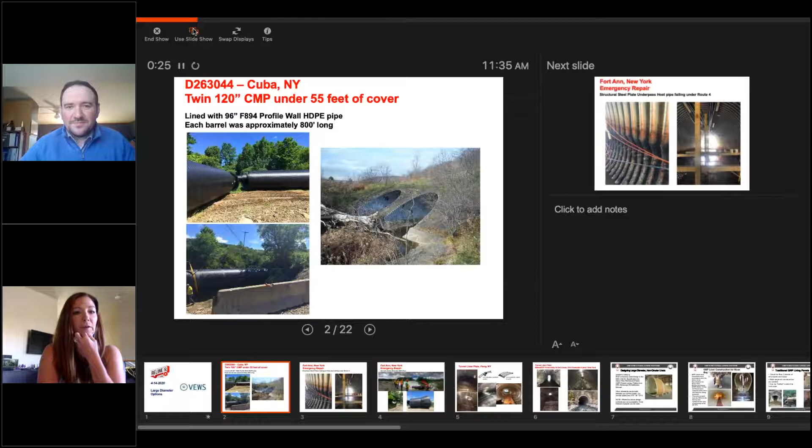So tell us a little bit about this project. Sure. So I guess in general, this Reline Live with Cassie, she asked me to highlight some options for larger diameters, and what we mean by that simply is usually typically greater than 60-inch, 5-foot span. I've been fortunate enough to have a number of large diameter projects come across the Northeast region here which I've been involved with. What you're seeing here, to kick things off, is probably the longest total footage of pipe that I've been involved with in any project to date. This total job was about 1,600 feet. It was a good project - a paved invert host pipe, 120-inch, roughly speaking, host pipes, double barrel, underneath Interstate 86.

And they had quite a bit of cover. As you can see, the shallow cover you see in the picture on the right is actually just an access road behind the highway, and there was 55 feet of cover on top.

So Cassie, one of the things I often hear from some DOTs is they're not familiar with the fact that high density polyethylene liners can be buried as deep as 50 to 60 feet, even deeper sometimes. Do you see that out your way?

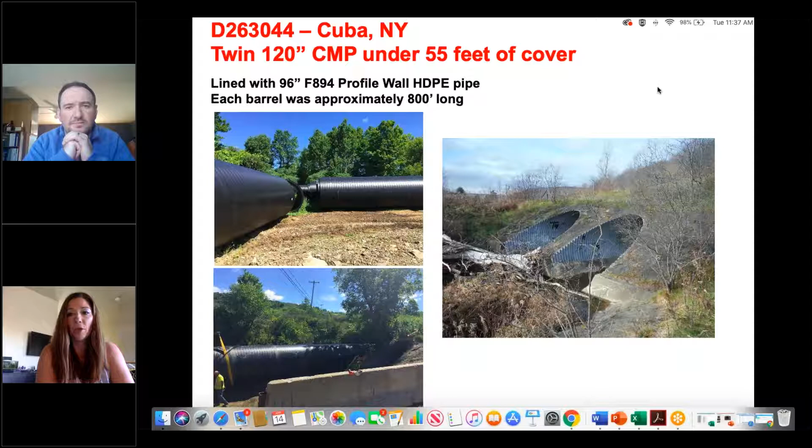We don't see a lot of pipe buried that deep. I will say there's a couple, and I don't know if Kelly is on or not, but he's done a couple of projects in Utah that have deep cover for sure.

Sure. We have, as you can imagine, quite a bit of terrain change out here in the Northeast. But out here in New York, this is actually an interesting territory - there's not a lot going on out there. They call it the southern tier, basically, of New York. Beautiful country. There's a cult following cheese store in that town of Cuba, New York.

But this one was 1,600 feet of 96-inch ID. So when we talk about profile wall high density polyethylene, that is usually an inside diameter dimension, and then the OD is in addition to that diameter. So this was 96-inch inside diameter, and this was all welded together pipe.

And one of the reasons the DOT chose this pipe is for service life longevity, and obviously with the stream being what it was, there was some decent scour potential, hence the reason they had the paved invert in the host pipe. So they like the abrasion resistant properties of the high density polyethylene.

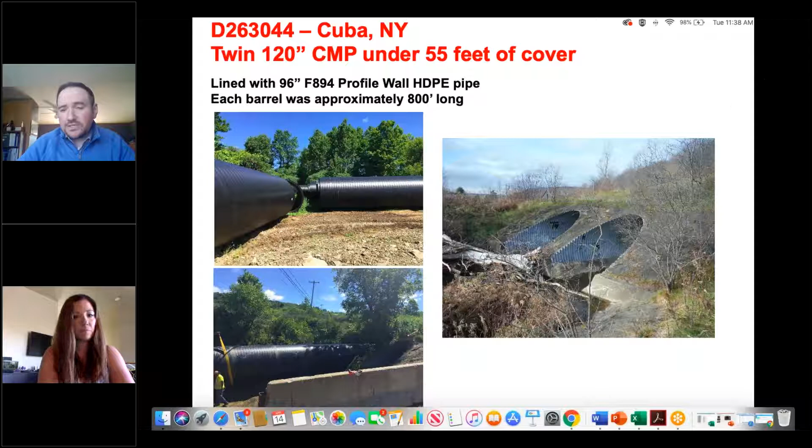Okay, really neat job. I had a friendly contractor do a fantastic job on that installation.

So one question that came in prior to the call: when looking at jobs, you started talking about why they chose it, the abrasion factors and things like that. What would you say are the top 3 factors you take into consideration before recommending a product? Because you do a lot of recommending when you go out on these job sites, right? You're coming out, inspecting the pipe, going through it, and then coming in saying, here's a few options I would recommend.

100%, Cassie, that's correct. I do have a top 3, which I'll give you in a sec. I actually do a presentation called 7 Design Considerations for a Reline. The 3 I think hit the top, not in any particular order, are hydraulic considerations, structural considerations, and service life.

Oftentimes service life, most of the things that you and I typically look at are like, hey, we want to push 75 to 100 years plus worth of service life underneath our highways and roads. So usually that service life thing is an automatic checkbox, because we know that everything we're talking about is going to offer a 75 to 100 year minimum service life. So the 2 that are left are hydraulic consideration and structural. Those are really the 2 top.

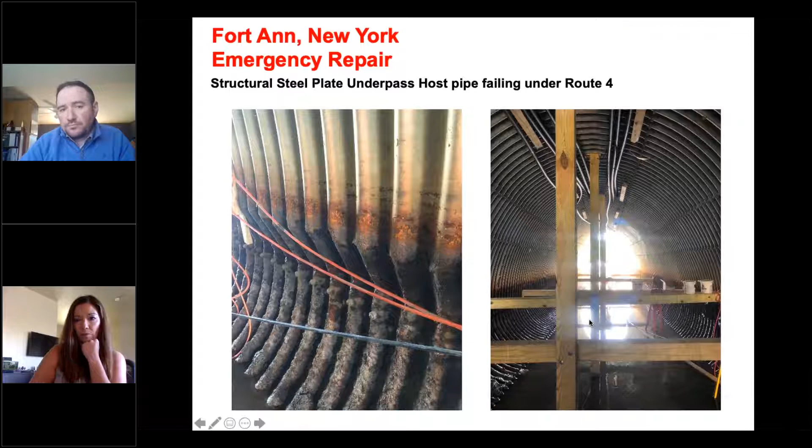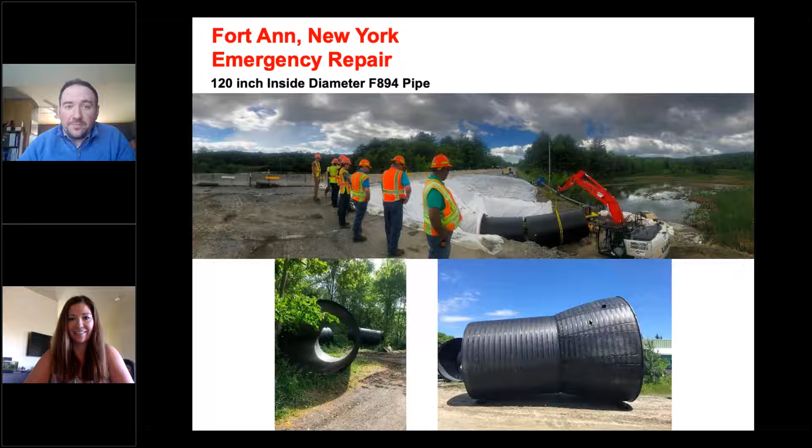So Cassie, I know for a fact you guys see a lot of these really bad pipes, and you get phone calls from folks who are like, oh, this pipe's too far gone. You ever hear that sentence? Oh yeah, we get that a lot, especially where there's a lot of water. We do a lot in Oregon and Washington, obviously Idaho since we're based here, but with a lot of the fast moving creeks and streams and rivers, we can get a lot of rust, and this looks very familiar on the top left - the abrasion. Yeah, absolutely.

I get that sentence all the time, either from an engineer or owner who might think that a host pipe is too far gone to be a lining candidate or a slip line or a rehab candidate. And oftentimes, there is a possibility that you can salvage that culvert with a rehab.

In this particular instance, this pipe was in horrible condition. It actually partially collapsed on the upstream 30 feet, but we were able to salvage it and bring it back to life. We used a 2-flange tunnel liner plate. We had to cut out some of the invert and do it safely. So we were able to accommodate that with the tunneling capabilities of tunnel liner plate and keep everyone safe while doing so.

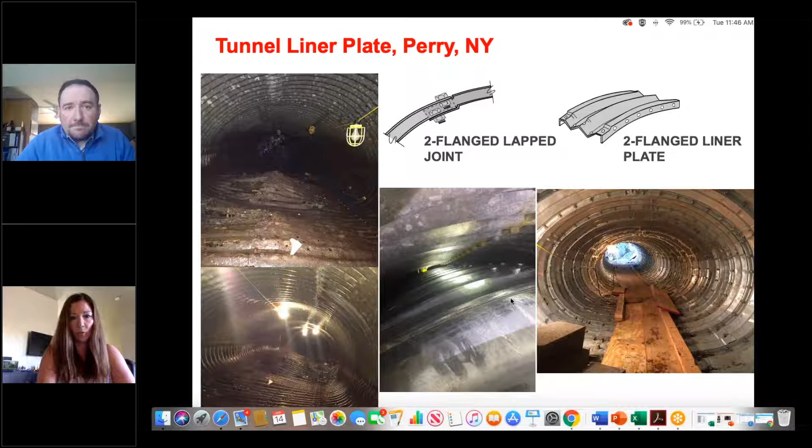Do you want me to go to the next slide? Sure. Oh, yeah.

So just another great seeing example. What's that? I said I like seeing these kind of projects. Fun shapes, interesting. That's an interesting culvert.

Yeah, they are. And I think that's part of the affinity for these plate solutions is they fit a need in the sense that a lot of these structures are so old and so far gone. I mean, they're beautiful structures, right? You just can't imagine how they put this stuff together 100+ years ago.

Yeah, and both of these were incredibly gorgeous structures. From a bridge geek and a structural engineering geek, I really thought that they were really neat to look at. The two pictures on the left are right here in Maine, where I live, in Freeport. And the top picture on the left is the host, this beautiful stone arch on top of wooden logs, believe it or not, underneath Route 1. So it's one of the heaviest traveled roads in Maine.

And we ended up putting a sort of underpass shape in there with some baffles for bed retention sills for eels. So it met not only the structural component, but it also met the DEP, Department of Environmental Protection's needs as well from an aquatic life sensitivity perspective. So once again, salvaging this structure, not having to dig up 30 foot of roadway and Route 1, and able to pass all the needs of the structural and the DEP.

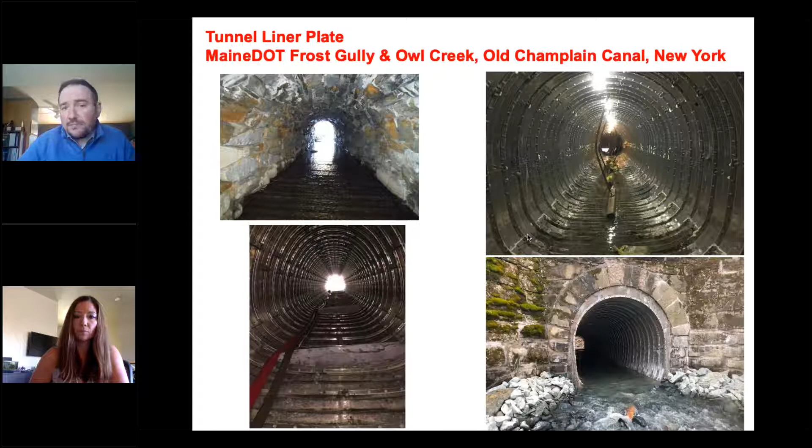If it's a corrugated product coming out of a corrugated plant, most often, at least here in the Northeast, we would weld those in. But I think they could probably accommodate you. In a few slides, I'll show some HDPE baffles too, which we could do in the plant or in the field, depending on what works best for that particular project site. Great question, though.

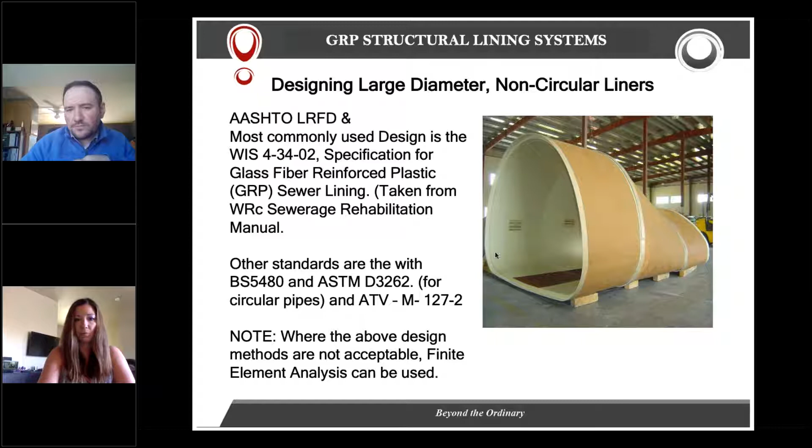You'll see in the next slide - Cassie, if you want to go ahead and toggle over there. Oh wow, yeah, so nice egg shape for sewer, but we also make some really tight corner radius pipe arches for culverts as well, where we've got some of these really cinched haunches.

I've been dealing with a lot of these culverts - they were arches and they've crimped down a little bit over the last 40, 50 years, so the rise has gone down underneath live and dead load. Trying to fit maximum hydraulic openings within these little areas has been a unique challenge that the fiberglass GRP has been able to meet.

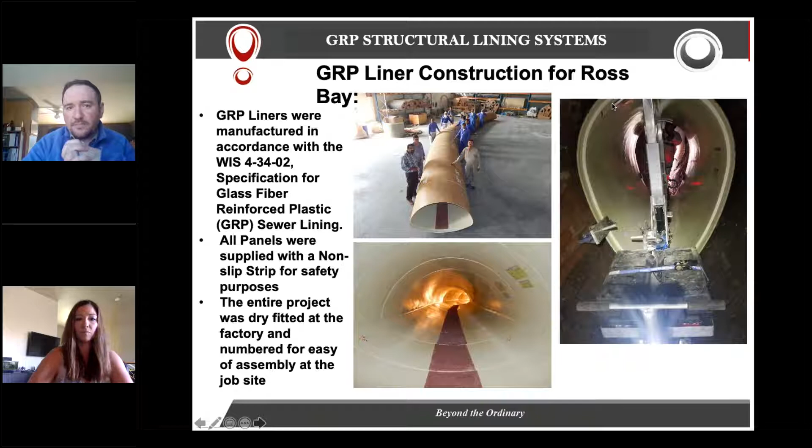There we go. This was the other gap that I didn't really have. We can fit some other shapes in there. What I found - you probably hear it, Cassie, out your way - sometimes engineers and owners will say, hey, I've got this 3-foot rise by 10-foot span box culvert that was built 100 years ago. Can we shove 3 round pipes side by side in here?

And the answer is yeah, typically, but I usually caution and say, you're either going to restrict your hydraulics quite a bit, because you've taken a rectangle and put 3 smaller pipes inside. Part 2 to that is they've possibly created a debris capture potential on the upstream end, because trees and twigs can get caught by reducing that area.

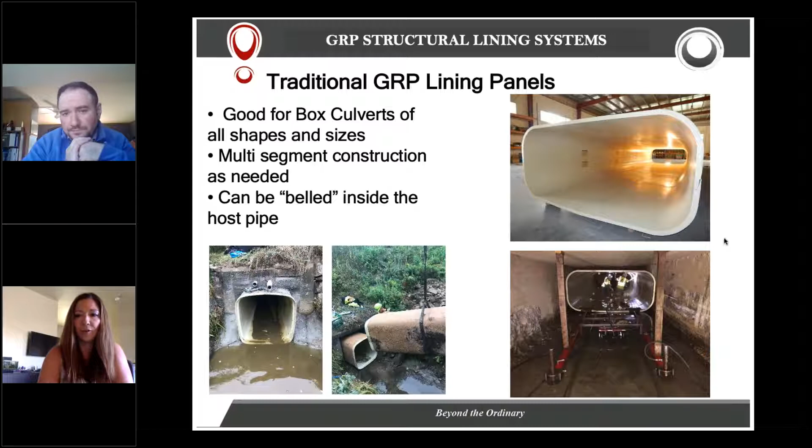Now I realize this is all very 30,000 foot view type stuff, but Cassie and I were talking about maybe doing a little mini series afterwards if someone wants a more specific Reline Live in the future. We could certainly talk more deeply about some of these other solutions. But this is more on the unique shape offerings of GRP.

I don't want to insert foot in mouth here, but if you've got a shape that you need, if we can think it up, we can probably make it. So you can just see some other unique shapes there.

To answer the bottom left question there, Cassie, about the bell and spigot - you can see they're pulling that in with a winch system. There's maybe some 2x4s in the invert there, and they're belling that up inside the host pipe, sliding it in and snapping it inside the pipe. So it offers you some versatility if you need to come at the pipe from both ends, for example - if you had to, you could.

That's definitely been cleaned out too. You can see how to slide that in there like that. Yeah, absolutely, and they've got some skid rails down at the bottom.

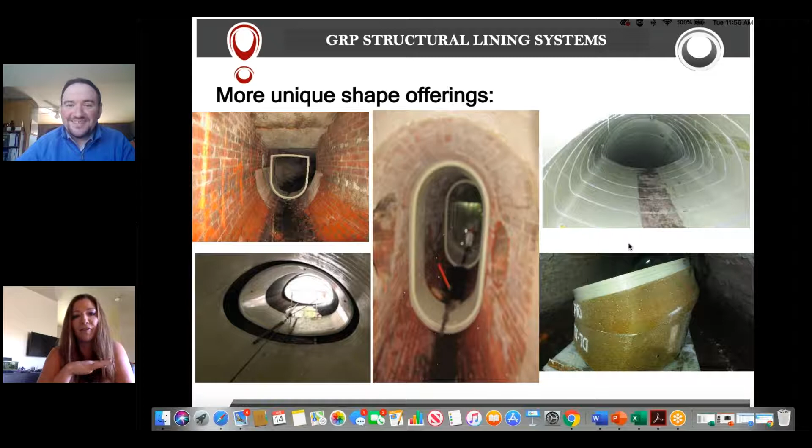You guys have some of the coolest infrastructure though in the New England area compared to, I think, some of the stuff that we have out here, just because it's so much newer. Yeah, a lot of stuff to catch up on with not a lot of money.

So this is a product I'm very familiar with. It is indeed. Was it last week? Yeah, Hydrotite.

So this is a solution - a lot of, you probably find commonality here, Cassie. A lot of the RCP is typically... there's some that are out there that are really bad, abraded away, the steel's exposed, and it truly needs to be relined. But much of the reinforced concrete pipe is typically in okay shape with the exception of the joints. With the frost, freeze thaw up here in New England, movement of the pipe vertically and or laterally, longitudinally, we get these joint separations, and then sometimes you end up with soil migration or water like you see in the picture in the center, and then inherently you get a sinkhole on grade at your pavement surface. So these seals, they're a rubber seal with stainless steel hardware that go in very efficiently, and they're meant to basically stop the backfill from migrating through the joints. So it's not a structural repair, but it's truly something that can help add service life to a culvert just by mitigating the joint backfill loss.

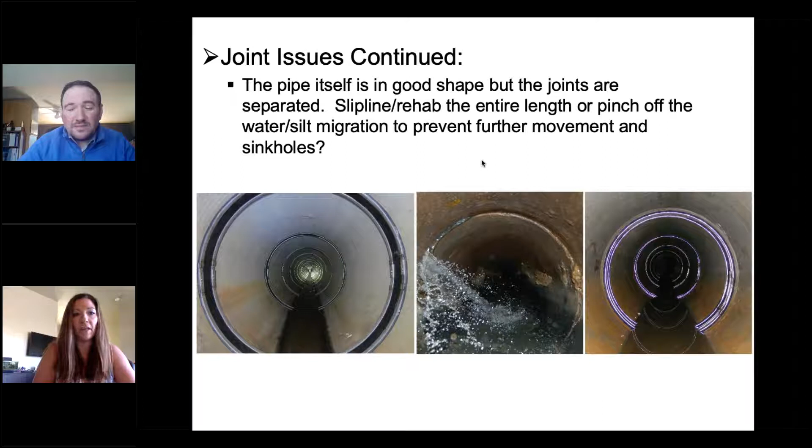That's a solution that, as you guys discussed, is available from 18-inch small to pretty much 18-foot large - any diameter between 1.5 feet and 18 feet for the most part. Yeah, they can customize them. Here's another view of those joint seals.

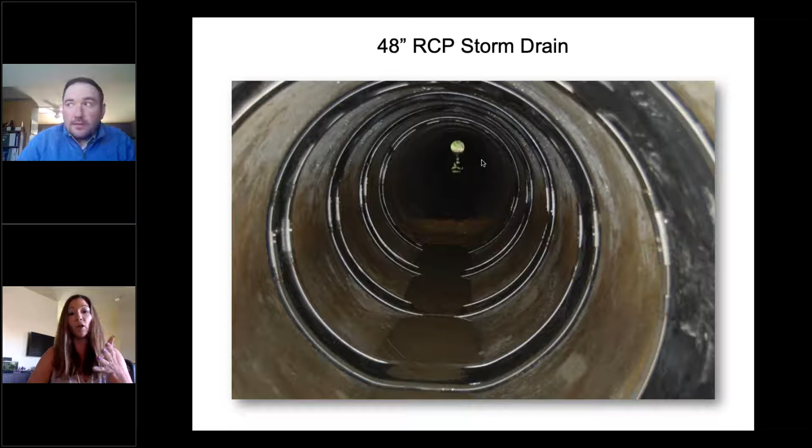What I thought was really interesting too, Don, is them being able to - so if your separation is greater, their extra wide seals can actually connect together and make a larger fix, which I thought was really interesting. I didn't know that until I sat down with Heather. Yeah, in theory, you could go the entire length of a culvert if you really wanted to.

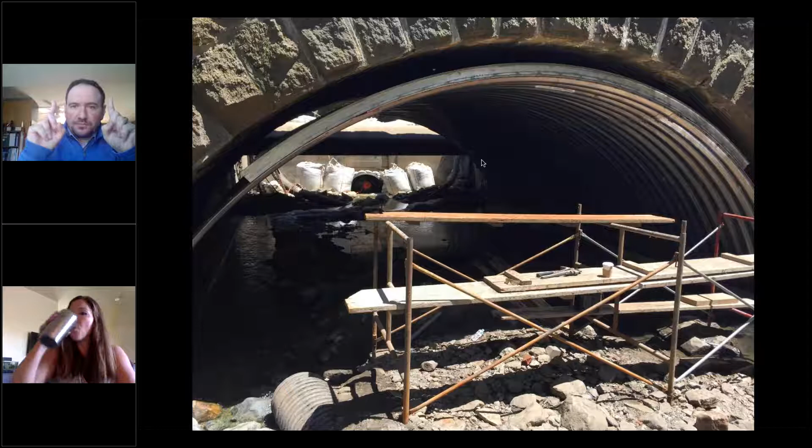Not a structural solution, but I've got just like here on a pipe in Maine, we did one joint just to do a demonstration, and that gap on that first joint might have been 7 to 8 inches or something. You could see the poor backfill they used when they did this thing 60 years ago. When you look further upstream, some of those joints are separated 18 to 24 to 30 inches even. We'll usually put a stainless steel backer plate in behind there and try to add some service life to that joint and prevent further migration of those soils.

One thing that came up when we were talking about it was offset versus separation. So what's the largest offset you've seen this product work with?

Personally, a few inches. Bear in mind, I've only been associated with them for maybe a year and a half, but I think each joint definitely provides a unique challenge. That team is really good as long as you can go in and take measurements, which they will request, of the offsets plus whatever the gap is.

Usually, as you said, they can customize some stuff, right? So they might not give you a nominal dimension band. They might make up one that can stretch a certain amount of offset plus horizontal gap. But a few inches is what I've seen to date. I'm sure there's going to be some where it gets even crazier, and we might have to figure something else out.

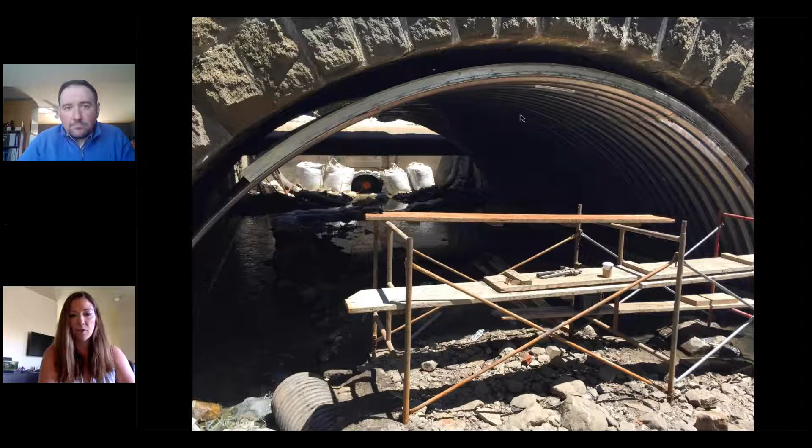Okay, so what are we looking at here? So you can skip right ahead. I figure as part of the large diameter conversation it's important to remember that you guys do some plate and other type solutions like that out your way too. We have these bridge span size culverts or small bridges, where there's an open waterway below. You have either native stream bed material or that invert is buried. You're on a footing. This is aluminum structural plate.

Once again, a plate structure that has very high service life, great abrasion capabilities. What you're seeing there is basically them plugging into one of the grout ports to grout the space between the liner and the host arch, if you may. This one I think was a 15-foot tall by 30-foot span, roughly, plus or minus.

This actually leads me right into my closing out of Reline Live. This is actually the conversation we're having on Thursday. We're bringing on a bridge specialist from Contech Engineered Solutions, and he's going to be talking about these multi-plate structural bridge structures. So that's a lot.

Like you said, especially out here in New England, there are so many of these old stone arches that are historic. They're beautiful. So most of the time you have this desire to want to salvage the faces of the culvert and try to put the stone, point the stone, and put it back together the way it originally looked. Bearing in mind, there's a structure there that you have to salvage and you're trying to keep people safe. How do you do that?

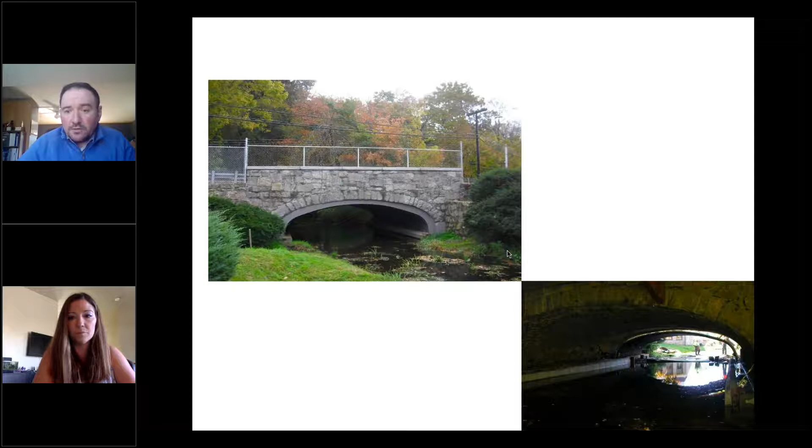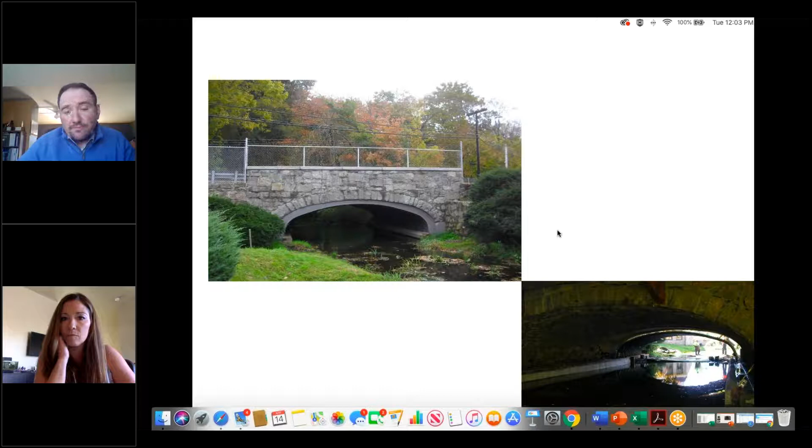Let's see. Ooh, that turned out great. So you can see them sliding it in on the new footing. Minimal disturbance, they're not disturbing the front faces at all, and they basically fix the structural component back to full capacity. Perfect.

Here we go, timely. So you had asked the question when we were talking about the main culvert there with the stone. So oftentimes, and especially more now than ever, aquatic sensitivity is a high consideration for DEP, DES, whoever it may be.

So it's kind of a double-edged sword. You're trying to maximize flow, right? So you're trying to get the best smooth or best waterway area, whatever it may be, that's going to optimize that inlet or outlet control culvert, but also maximize the ability for native stream bed material. So what you're seeing here is a high density setup.

So you've got a corrugated metal in the top left with a welded - you had asked that question too about welding baffles, just like a V-weir in there. And you can see the grout ports in the wall, so they can hook in to grout those in place. And then HDPE baffle in the bottom left, inside a interior open profile pipe.

So it's a corrugated - if you're familiar with like the ADS or the Lane corrugated outside pipe, imagine that on itself. It's got like a smoothish outside skin, and then you've got a corrugated interior, so native silt material can fill in those things and help create a natural stream bed environment for aquatic life.

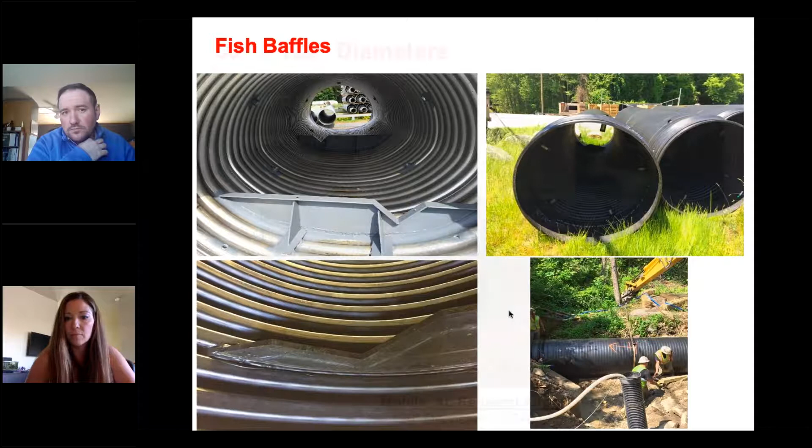Alabama. Yes, so this is what they call in the industry steel reinforced high-density polyethylene. This is a solution I've used quite a bit in the culvert rehab space for municipal and some DOT applications, where you're trying to, as you can see, the wall is fairly thin, but fully AASHTO because of the 80 KSI steel inside, and you have the abrasion resistance of the high density polyethylene. So it's super lightweight, and when you have these long runs of culvert, it certainly can help to push and or pull the material in place and do a nice job.

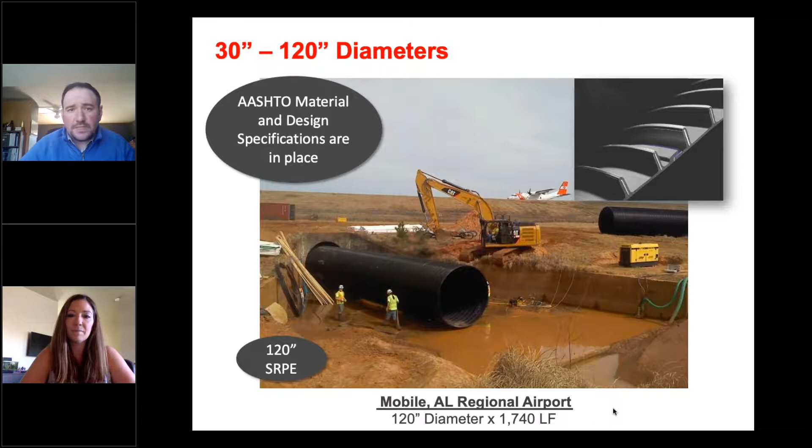Here's a good example. So this is steel reinforced polyethylene, same product you saw in the previous slide. This was, believe it or not, old tunnel liner plate and some multi-plate on the upstream end, and I literally could fall inside that hole there and probably go up to my chest in it. The hole was that big. This is underneath. So Massachusetts DOT, I-91, both north and southbound, and also railroad tracks. You can see in that bottom left picture just the amount of backfill that was seeping through the holes in the pipe.

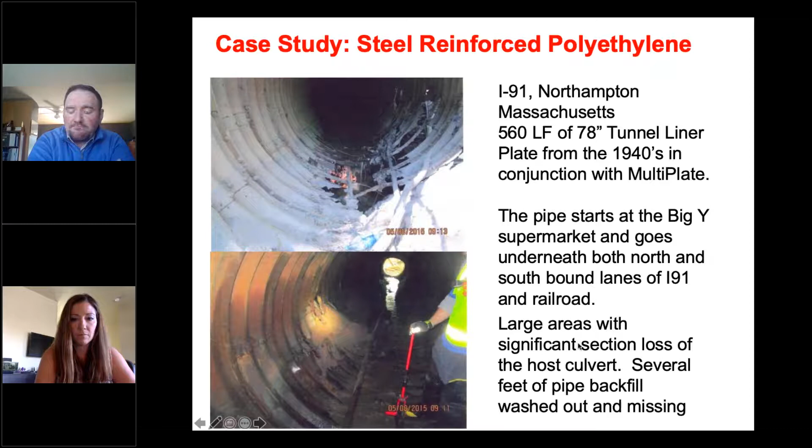So that was 66-inch steel reinforced HDPE. And I like the photo on the left, I was able to catch that as the train was going over it. They were sliding the last few sticks of pipe in and buttoning that thing up, putting a brand new head wall on it, and getting out of there.

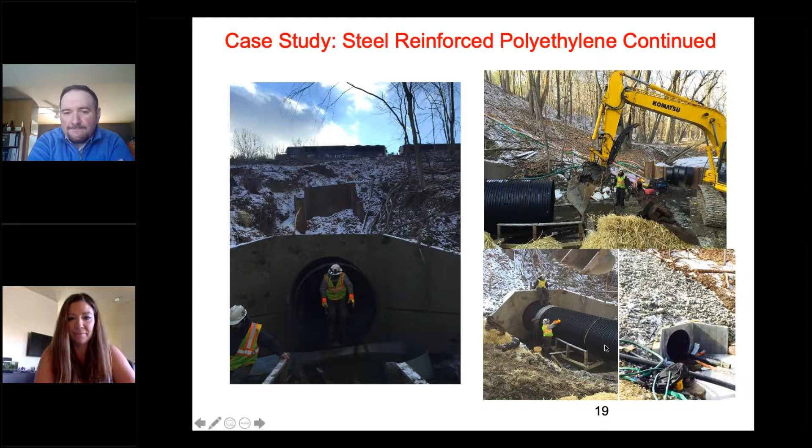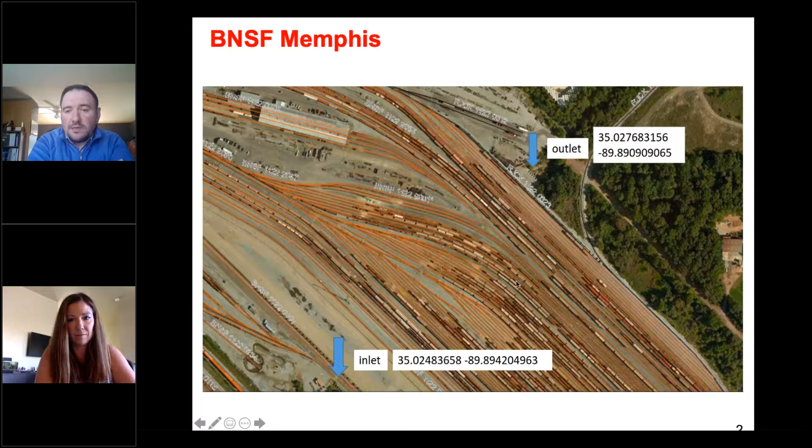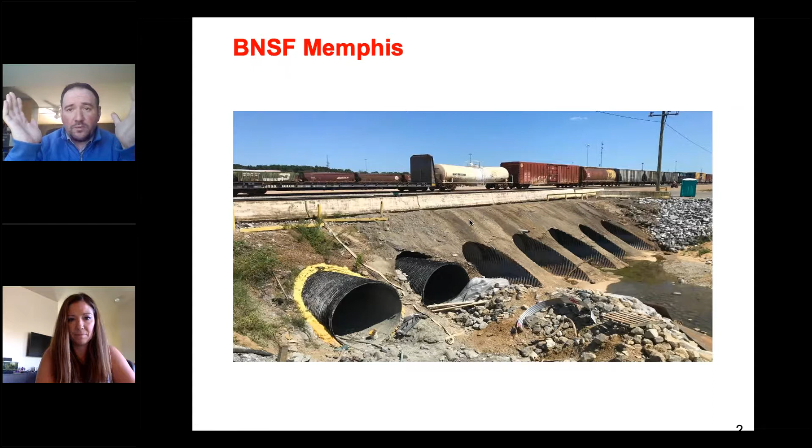Another one that's a little bit outside of my geography, but it would make one of my colleagues proud. This was, I want to say, 7,000 feet of steel reinforced polyethylene. If you click to the next photo, you'll see they had 7 runs, each about 1,000 feet, give or take a few hundred. They were segmentalizing how they were going to do each barrel and then grout that thing. It took a lot of grout too, but they were able to do it—you can see how big that rail yard was. So they were able to fix that.

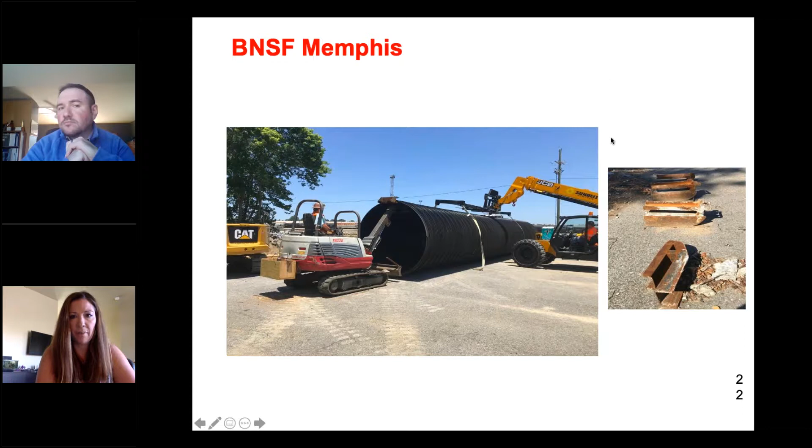This is just another shot of that pipe, correct? Yeah.

Oh, my screen just flashed. All right. There we go.